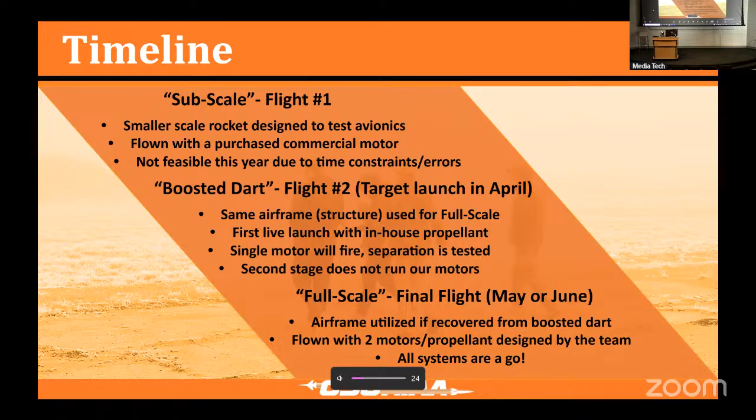I don't know if we had audio there, but it doesn't matter. David, if you're sharing the screen, try to share it and make sure you click the share audio as well. I don't know, I think it was just background music. There were some cool explosions, but it's all right.

So that's essentially what we're doing: we design, we build, and we fly a 2-stage rocket. It just happens to be the only 2-stage rocket on campus and one of the very few in the Pacific Northwest alone.

Designing comes in the first phase of our capstone class in the early parts of the year. That first probably 3 months is dedicated to design, and that includes details from last year: how did they succeed, what do we need to do, what do we need to change, all of that sort of thing.

And then we move into manufacturing. We had some pretty cool stuff come up this year that was new, but it was also reiterations of last year. So the ideal timeline for one of these things is what we start with, what we call subscale.

This is essentially a tuned-down version of what a full scale flight would look like. We don't fly 2-stage, but we do fly a dummy sustainer, or the top stage, that mitigates and basically copies the weight of what a full second stage would look like, so that we can test ejections and we can test that separation. That is what makes a 2-stage a 2-stage.

And then we move into what we call boosted dart. This is essentially what the full scale airframe is, under the same airframe as a full scale. We fly, again, 1 motor and a second stage.

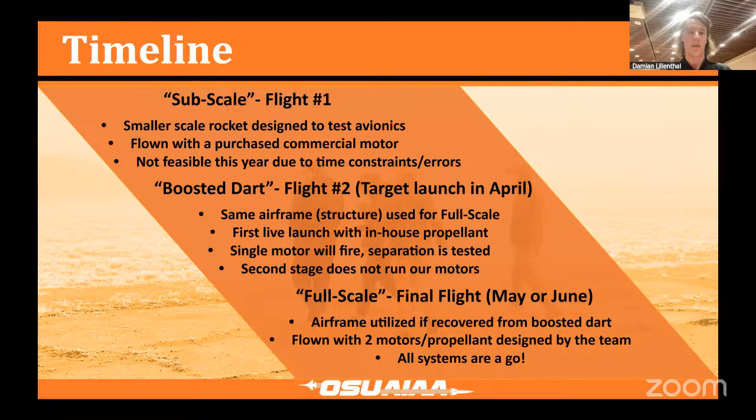So this was a brand new sub team that we introduced this year, dedicated solely to aerodynamics. Last year and years prior, this has kind of been a thing that our structures team has taken on, but we had one of our new capstone guys come in this year, and he had some preliminary knowledge on how CFD works, and he saw enough work to be done to make this a dedicated team.

Essentially what they're doing is all data analysis. They sit behind a computer, run CFDs on previous launches, try to figure out what exactly is going to get us from that 64,000 feet to the 100K goal that doesn't have to do with new propellant, maybe it is weight reduction. But part of that was fin design, so we based our new fin design this year solely on these CFD analysis simulations that they're running.

For weight reduction, we integrated 2 fully composite motor tubes into our builds this year. And then we also added this, what we call a pitot probe, which is essentially what allows us to monitor dynamic pressure, which just gives us a lot more data to fall back on for future teams to come in.

This wind launch correction kit was a new idea that a different capstone had in mind when he came in, new this year. Essentially, this is a ground station, a big box with a 30-foot pole and a computer linked into it that monitors live feed from local weather stations, which would allow us to throw our launch angle at whatever is ideal for that day and time, to maintain a perfectly vertical flight, because we've had launches in the past land 8 miles off horizontally. If we can correct that, that would be amazing.

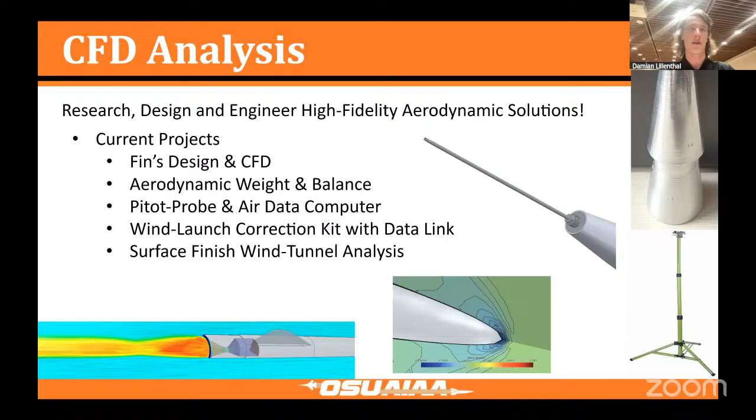And then surface finish, this boils down to paint and wind tunnel testing and all sorts of things. That's all new tasks that a brand new sub-team has integrated this year. Super cool stuff that we haven't done, but we can utilize it for just about every other team.

So next slide. How do we recover? A big part of our builds falls back on successful recovery. We don't just want to launch a rocket in the sky and never see it again. We want to recover it, and that's how we get our data for new builds.

So this is our avionics team, you can see a little picture up there on the right. Small group, but that was the early part of the year. They design what we call an avionics bay, a 3D printed assembly that houses all of our computers and our mag switches. These circuit boards are mag switches, which allow us to kick on our computers on the launch pad once the rocket is fully integrated and inaccessible on the inside. We run a magnet around the outside of the body tube to cue our computers to start, because if we leave them on for prolonged periods of time, batteries will die and we won't recover data. So that's kind of their whole thing.

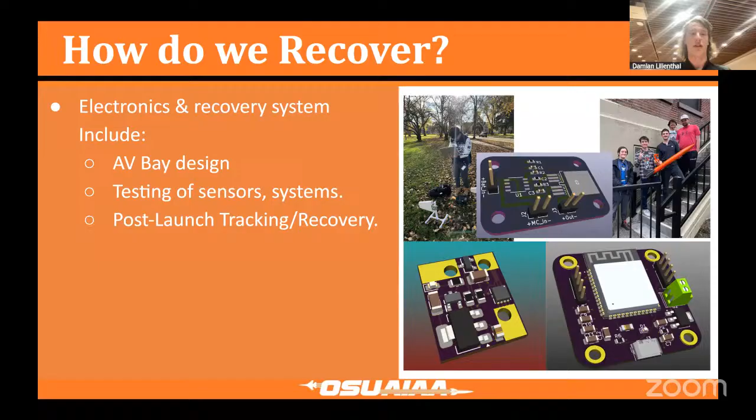They integrated a couple of new computers this year. Post-launch tracking is kind of what this entire system is all about. So, next slide, I think.

Okay, propulsion. We are in the middle of running simulations on new propellant, but every propellant we run in a full-scale build is done in-house in a lab we have off campus. All of our propellant mixes and chemical formulas are passed through chemistry instructors here on campus and faculty advisors that have knowledge from previous teams we weren't a part of. So we're always experimenting with what's going to get us that higher altitude, because propulsion is obviously what makes your rocket go up.

So when the team first started back in 2016, we started with a propellant mixture called liquid sand. Then we moved to black flame, which is what we're currently using. These are pretty similar, with the exception of grain size in ammonium perchlorate, which is the one oxidizer that really makes this stuff go. Super dangerous stuff, but if it's done safely, it's super fun.

And then we're studying this new propellant called cherry limeade with a new AP that, on our simulations, shows a higher specific impulse value than anything we've ever used before. Burns at a much higher temperature, but specific impulse is basically a measure of propellant efficiency. So that's the number we're focused on most when trying to idealize propellants in both of our stages. Next slide, I think.

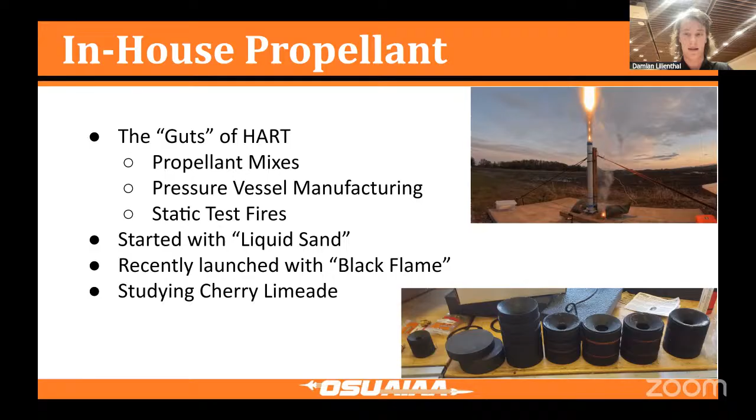And then the airframe, this falls back on structures. So if you're looking for more of a hands-on experience, this is definitely where you want to be, instead of sitting behind a computer running calculations most of the time, or just studying.

So these bulkheads basically integrate into the rocket's body tube, and they're secured by screws on the outside of the body tube that allow us to secure our motor tubes inside without worrying about the tube sliding forward or backward. Because if you have a rocket go up and the tube pushes forward, it's going to try to slide into your AV bay and stuff like that. So we want to secure them as tight as possible.

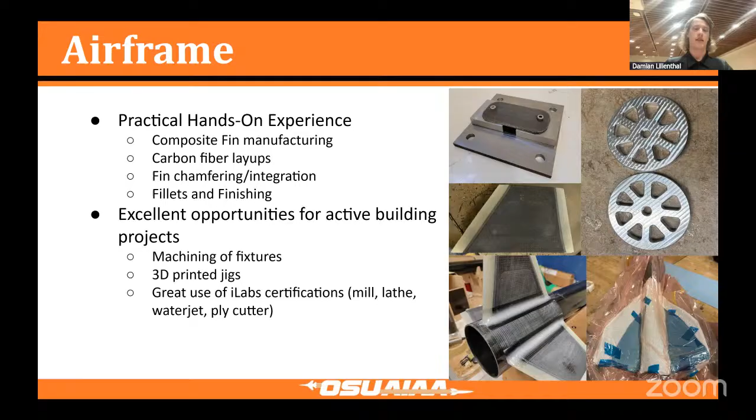Moving forward from one of the three rocket teams that Damian mentioned, if you're interested in the aero flavor of aerospace, we have two plane teams on AIAA. The first one is Design, Build, Fly. Fun fact, this was actually our first team for AIAA, founded about 12 years ago. As the name implies, the competition is to design, build, and fly a remote-controlled aircraft from the ground up every year, according to a new set of challenges provided by the competition heads. For example, last year's competition was all about high thrust and short takeoff and short landing.

So you saw a lot of planes with pretty beefy motors on them, pumping out anywhere like 120 amps, and high lift wing configurations. In addition to short takeoff and short landing, they also had to fit within a parking space. So not just the aerodynamic and power considerations of your plane, but also how it works operationally on the ground. When they had to fit within a small parking space, our team built folding wings, which they would fold up when they needed to park, and deploy for takeoff, landing, and flying the vehicle.

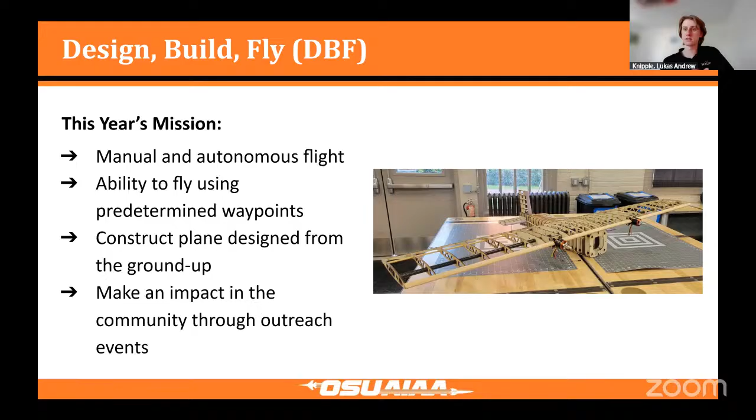Taking a quicker, more detailed look at the mothership this year, they went for a 70-inch wingspan and 2 dual props, with pretty beefy motors on it. They spec'd it for 10 pounds of payload capacity. While they didn't have to make the mothership autonomous, it just had to be remotely controlled versus the fully autonomous payload, they did integrate their autonomous circuitry and platform into it so they could fly it autonomously if they wanted to.

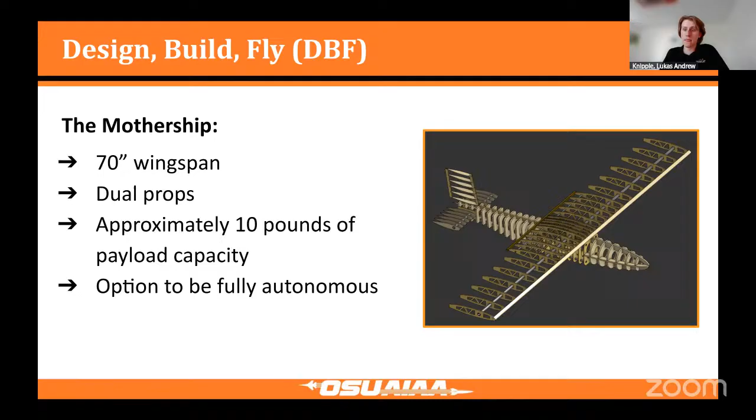I don't know if this video will play here. Watch that. This was them in the very beginning.

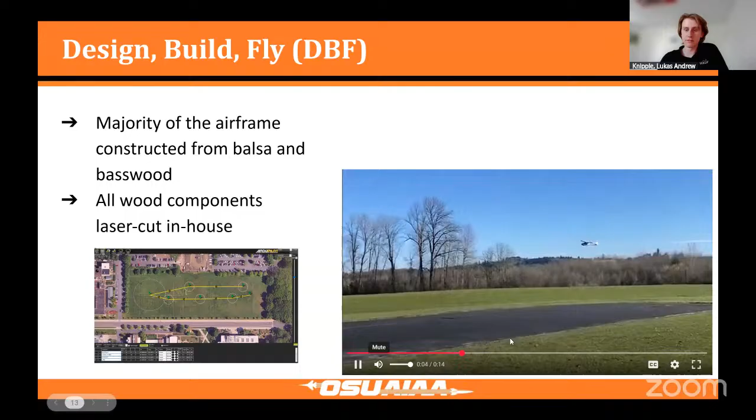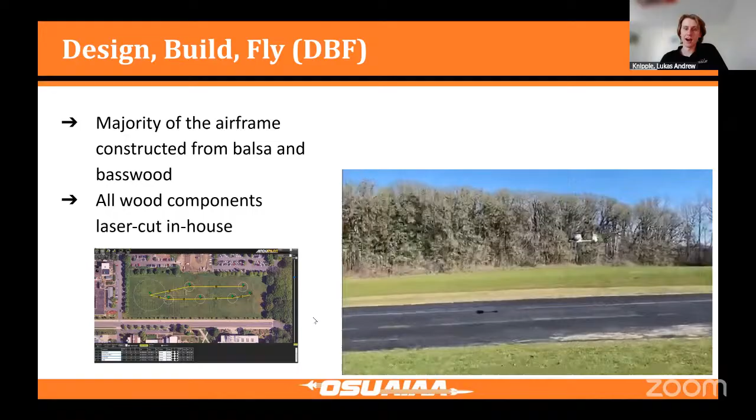A fun thing is you can't just show up and build a plane for the first time and hope that it works. So they had a variety of off-the-shelf glider kits and powered planes that you might find in a hobbyist store, which they were buying in order to understand what goes into building an RC aircraft. This is one of their more successful test flights with that styrofoam plane. As far as construction, it was majorly made out of basswood and balsa wood for a lightweight airframe, so they could have a high thrust to weight ratio.

When it comes to manufacturing and design, we have a lot of facilities on campus that allow them to laser cut all those components. In the bottom left corner, you can see that waypoint mission planning I was talking about. That's PV Field, one of our fields on campus here, that allowed them to play with that technology in developing their aircraft.

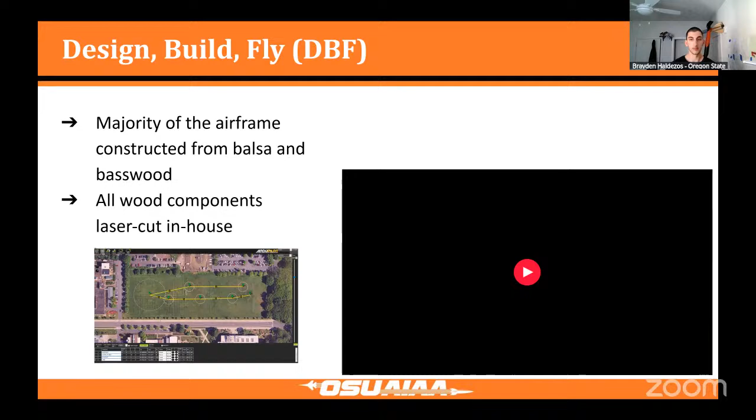A fun fact about that video you just saw is that was their first successful autonomous landing of the glider. That thing landed by itself, which is pretty cool. All right, so that's design, build, fly. It's one of our two-plane teams.

Moving forward, our agricultural drone team. This one's sort of an interesting one. It turns out there's a problem in Thailand where the farming population is aging out, so farmers are becoming more elderly and it's harder for them to maintain their farms and fields. Just physically, it's much more difficult for them to go out there. A farmer connected with Oregon State University with this problem statement and asked them to come up with a solution that would allow these farmers to still produce the output they need on their farms and do everything they've been doing their entire lives despite their aging condition.

So our agricultural drone team was born out of this research grant partnership. The idea behind it is you can have a heavy lift drone that will be able to autonomously navigate a farm and deploy things, anything from water to pesticides to herbicides to seeds, which allows this platform to do a lot of the manual labor that is involved in farming.

Over the past couple of years that this team has been working, it's been a lot of design work, collaborating with the customer. This year they were putting a lot of those designs into action, physically assembling the drone, and doing a lot of validation, a lot of controls programming, breaking things, fixing things, and very much taking on that engineering process that is involved with that.

In addition to developing this platform, the most important components to the customer was that it would be open source and inexpensive. So the idea is that you can put this technology out on the market for not a lot of money, so that any number of people could replicate the design and use it without having to front a lot of cash in a situation like this.

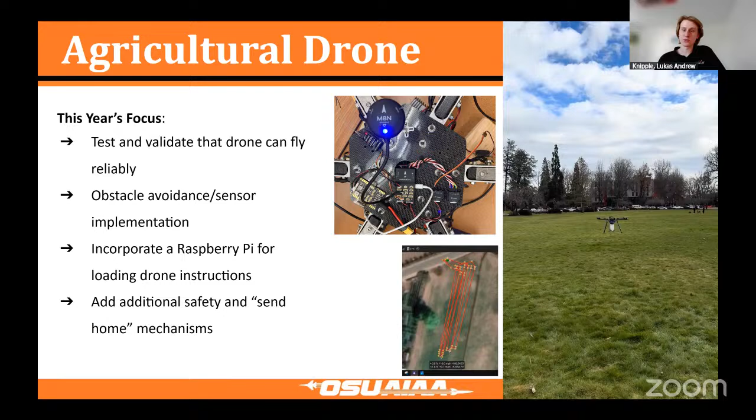This here is a video of one of their first successful flights with the drone to a 20-foot altitude. Some previous mishaps with some of their drone propellers and the control system had caused the drone to actually flip over in some initial tests. So this was one of the first ones where they're getting pretty excited that their platform was actually working with a payload on it, and it was looking very, very stable.

As far as a little bit of features they built into the drone this year, in addition to the core functionality of autonomously navigating the field, they also wanted to make it more user-friendly. So you see things like a Raspberry Pi on board that allows you to update a mission physically to the hardware of the drone, and then you can boot that information off the Raspberry Pi to get the drone to fly autonomously, as well as some safety features like object detection and avoidance, as well as a return home function that allows the drone to return if it detects it's low on battery, or if the user has lost visual line of sight of the drone, they can press a button and the thing comes back safe and sound. So that's agricultural drone.

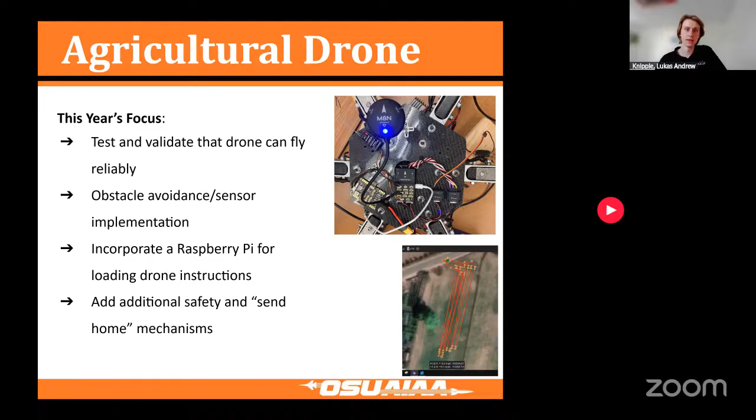All right, awesome. This is the second of our rocketry teams, the one that I'm on. I'm sporting HALE merch today. This one is our biggest team by far, and it is our high altitude liquid engine rocketry team.

As compared to a solid propellant, liquid propellants involve a lot more fluid dynamics. You have fluids like liquid oxygen as our oxidizer, cryogenic fluids to work with, and it becomes a very complicated, difficult process. When you see things like the space shuttle or SpaceX rockets, these are all liquid bipropellant rockets, and we're trying to do something similar to the real space industry just here out of Oregon State.

Next slide please. So, just an overarching goal of what we're doing: we intend to design, build, and launch a single-stage liquid bipropellant rocket to the von Karman line, which is defined as the edge of space at 100 kilometers or 328,000 feet.

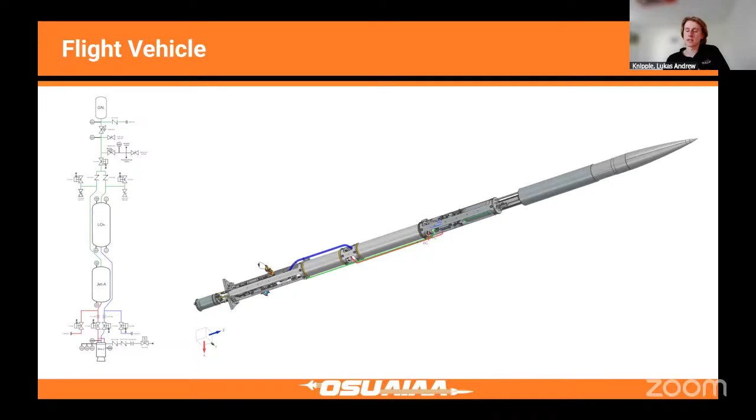I'm going to quickly move through this because we have a lot of content to cover. Looking at some of our systems, this is what our subscale flight vehicle looks like. It is 21 feet long, and it features all the plumbing, controls, structural components, and our second generation engine that will allow us to fly all of our systems, hopefully to 30,000 feet this summer. On the left you can see a P&ID, a piping and instrumentation diagram, that lets you abstract out at a higher level what's happening liquids and fluids wise in the rocket.

Next slide please. So one interesting challenge about liquid rocketry is, in addition to building an entire flight vehicle that you have to trust and that has to work and not blow up on the pad, you have to build a lot of supporting ground infrastructure. When we talk about just getting the propellant onto the rocket, like we see at Cape Canaveral and launch pads, there's so much infrastructure on the ground that allows you to safely and remotely operate your vehicle in preparation for launch.

Here at Oregon State we have our horizontal test stand, on the left, and our vertical test stand, which we're currently developing for the full vehicle. The horizontal test stand was built first, and it's just for static firing the engine alone - our first generation and now our second generation engine have been hot fired on it. In the image, the small cylinder shape at the bottom left represents the engine; everything behind it is just to safely operate and fire it.

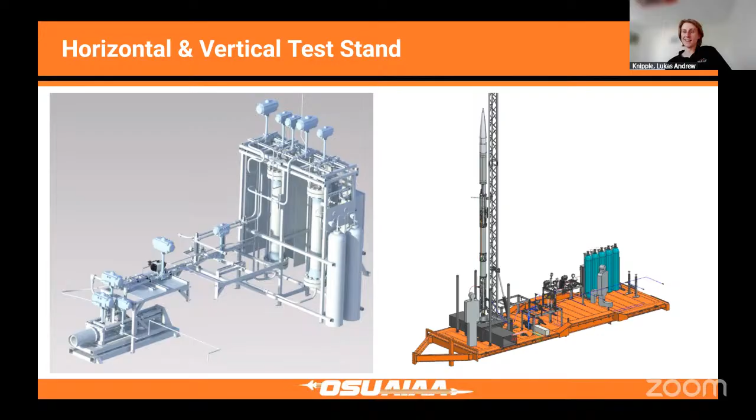On the right side, the VTS does everything the HTS can do, on top of supporting a fully stacked flight vehicle. We have clamps that hold down the rocket so we can static fire the engine with the fluid and plumbing aboard the subscale vehicle, and it also serves as a mobile launch pad trailer. The whole thing is on a 30-foot by 10-foot trailer that we're going to take down to LA on I-5 and launch east in the desert.

Next slide please, and this plays a sort of cheesy hype video of what we're doing.

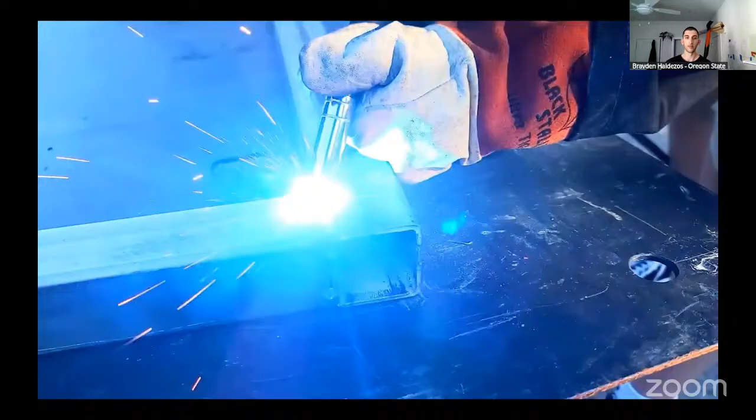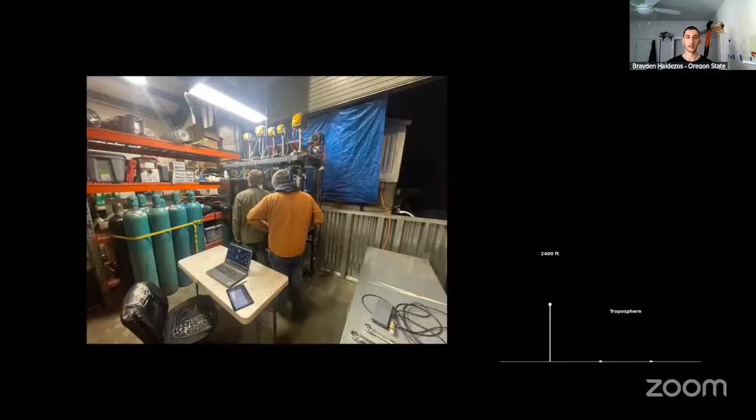So looking at that, that was the first static fire of our second generation engine. It is the first and second liquid engine developed by college students ever made in the state of Oregon. Here are some stills of the second hot fire. The difference between our first and second generation engine is a 50 to 20 pound difference in how much it weighs for the same thrust output - one is a proof of concept, whereas the other is actually light enough that we can put it on the flight vehicle this summer.

Next slide please. So we're composed of 6 sub-teams. I'll run through this as fast as I can - these enable us to do every component of this, and when we talk about hands-on work and what students actually do, it's on these sub-teams. First up is propulsion. Propulsion developed MIRA 1, our first generation engine, as well as MIRA 2, the flight-ready one. This table here is actually pulled from Wikipedia.

It's kind of cool - we use a pintle injector, shown in the bottom left photo. It injects an annular flow of fuel, and in all the directions and holes you see on the side, liquid oxygen gets pushed out into that ring flow to create a cone of mixed fluids. We are one of the pintle injector rockets you can look up on Wikipedia. They've been developing this engine for the whole duration of this program, about 7 years, and now this year we're very excited to actually put it on a rocket and send it up.

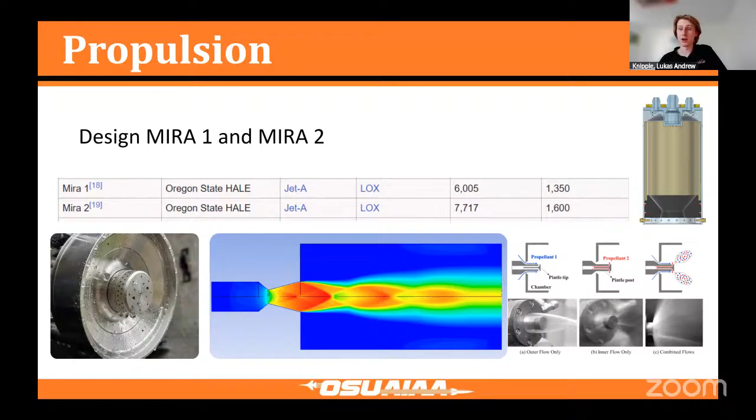For the vertical test stand, this team is completely dedicated to the design, fabrication, and operation of the vertical test stand. This year they've been doing a lot of welding and manufacturing work. They have to support the tanks for our gaseous nitrogen that pressurize the entire system, as well as all the fluids, plumbing, and control to get our propellants, our liquid oxygen, and our kerosene to the rocket.

On top of that, you see the massive launch rail there. It's about 60 feet, we're speccing right now. So they have to build all the support structures for that miniature launch pad to support the rocket before a launch sequence.

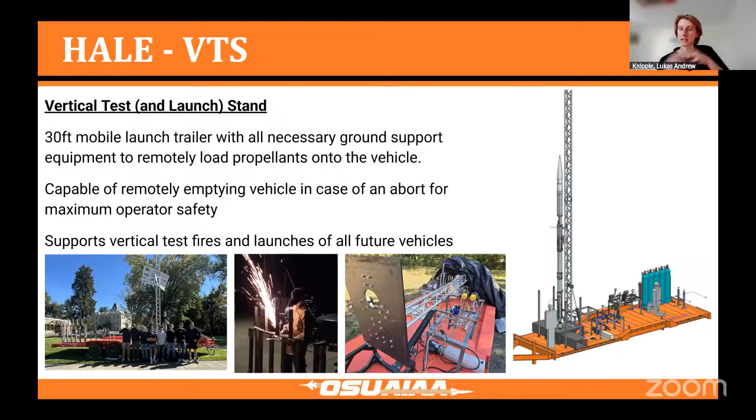Our fluids team is at the very heart of the plumbing of what's making everything happen. So you have an engine, but you need to get your propellants from point A to point B to support that engine and combust it in the chamber.

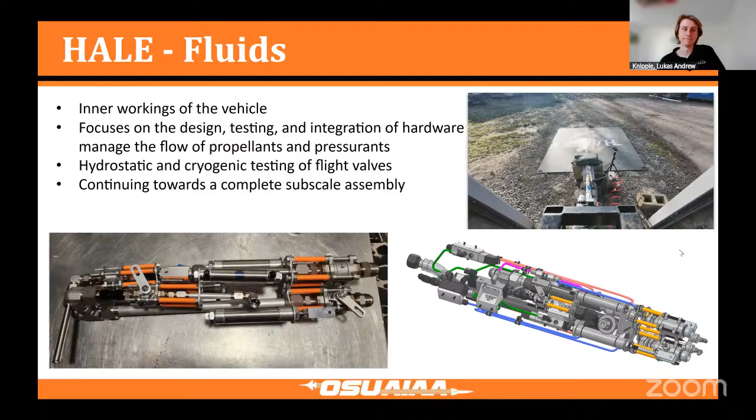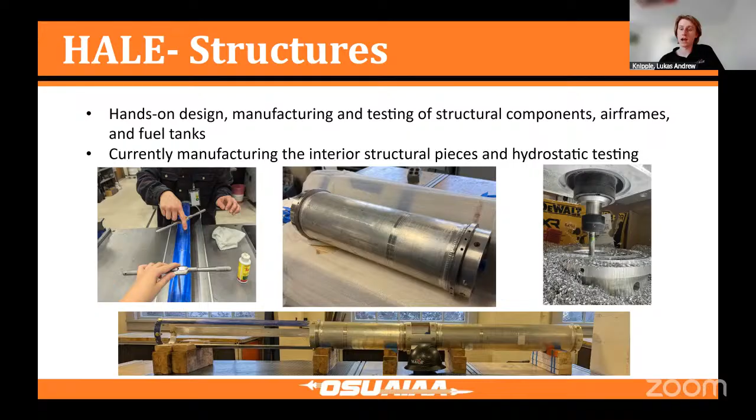They're doing a lot of FEA, structurally validating that this can take the forces the rocket's going to produce, as well as a lot of cross sub-team collaboration on how you get your fluid system rigged up, the wiring in the same part, and how you deploy a chute, and how that all comes together in assembly. They're very fundamental to the actual rocket when it comes together.

Then we have aero and recovery. They do exactly what it sounds like - they are the aerodynamics and recovery team. So any aerodynamic surface on the rocket, they deal with a lot of simulation on their part, making decisions about the nose cone shape and the fins and stability for the rocket, as well as designing a recovery system.

So we have a 2-parachute system, like Damien was mentioning, where you have a drogue chute and a main chute. Our drogue is 15 feet in diameter, so it's already a pretty big chute, but that's the smaller one, just to slowly descend from 30,000 feet.

Then when we're close enough to the ground, we pull the main chute. Why we don't pull the main chute all the way at the top is we don't want it floating like 30 miles by the time it hits the ground - that makes a very hard recovery on our part. So it's a 2-stage parachute system, and they're doing all the force calculations, the snatch force when we pull at apogee, making sure that whole thing is up to the standard we need it to be.

Safely. Then avionics, I can talk your ear off about this - this is what I'm on. Avionics is at the heart of the controls. Any electrical system on HALE, that's what avionics deals with.

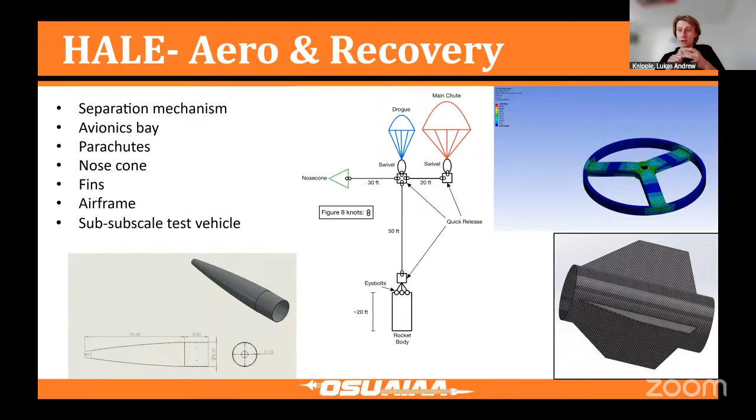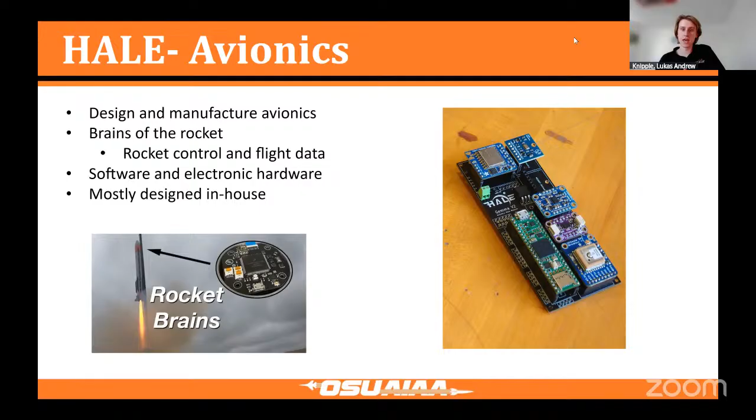Because we're doing so much active fluids control, we need a lot more custom design components because we need to interface with so many more sensors. That's a lot of what we do on avionics. And then that's all of HALE. So I'll pass that off to Brayden for APOP.

Moving off from one of the rocket teams and on to one of our jet propulsion teams - APOP is actually a design competition where every year a team is given this little JetCat P100 engine. You could hold it in your hands, and you have to design some sort of object that goes onto the engine and performs a specific task.

So last year, the design was to generate a reverse thrust mechanism, which you'll see here in a sec. This year, their job is to design a variable thrust nozzle for this engine.

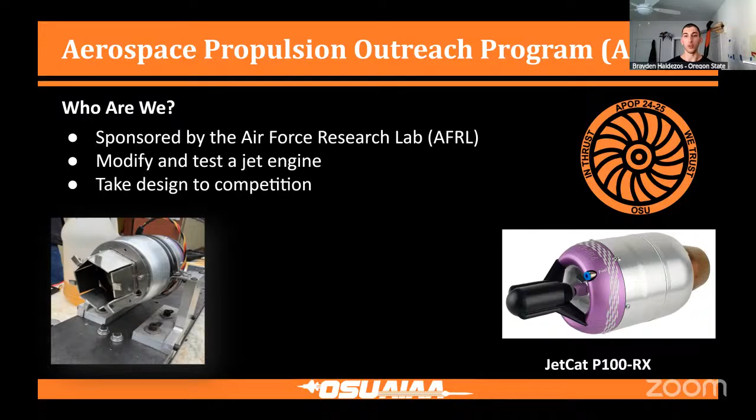The way they went about it this year is by designing fins that are all connected together by a helix gear, and a servo motor inputs motion onto one of the fins, which controls all of the fins at the same time. You can adjust the amount of thrust the engine produces by changing the flow out of the nozzle. The team is actually at competition right now at Edwards Air Force Base, which is pretty cool.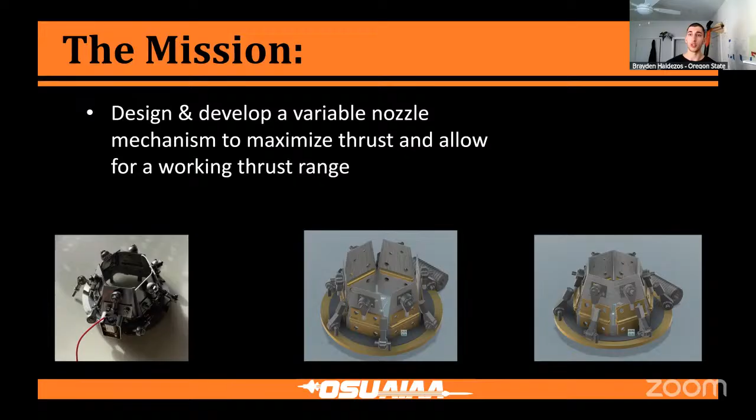Oh, my bad. Got to mute this video here.

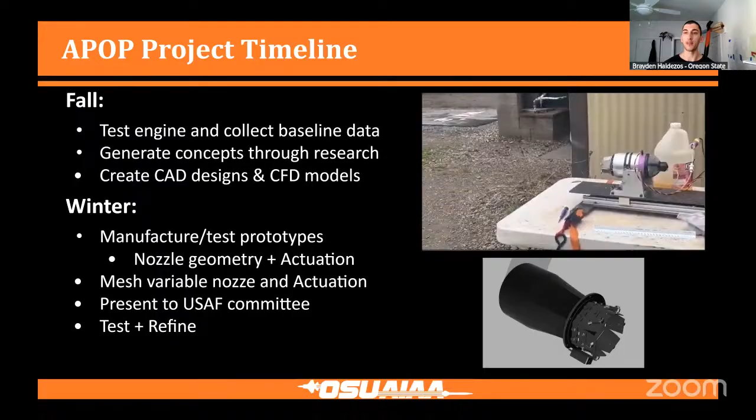This team runs in the fall and winter because their competition takes place in the spring. During the fall term, there's a lot of designing what this mechanism is going to look like. Here is a video of a very early test in the late fall. During the winter is when they actually do a lot of the manufacturing, so on the previous slide you saw a couple iterations of their nozzle. Then in the spring they go down to the competition. There's a final report, and in a week or so we'll find out whether or not they won. But last year's competition, they actually won first place, which was pretty cool.

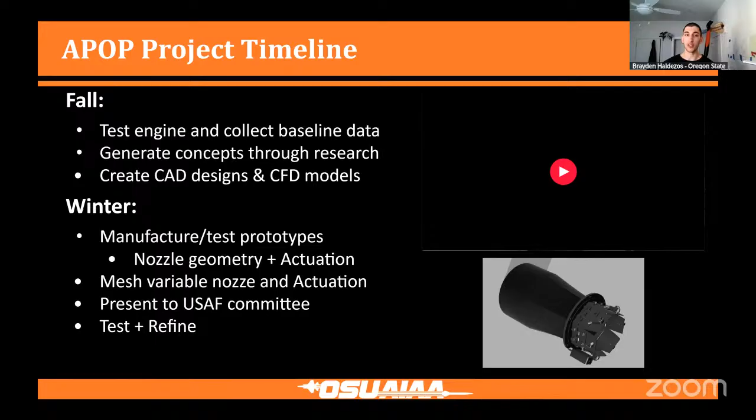But that's APOP. Moving on to solar airplane.

This is a research team, and the goal of this team is to design a high altitude flying glider that is completely powered by solar panels. If you think about satellites, they'll go up into space, do their science research for a couple of years, but eventually they die out, and then you just have space debris in the atmosphere. At the professional level, these gliders can stay in the air for months at a time. They have very low emissions, very little launch costs, and can perform the same science research that some of these satellites can.

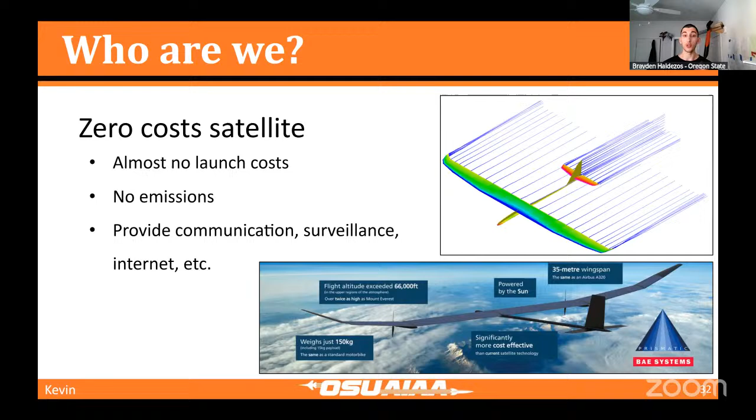So last year, you can see a little rendering in the top right of what our solar airplane looked like. It's got a huge wingspan, a lot bigger than it looks. But this year, the team made a dual fuselage because they found that when you attached a payload onto just one fuselage, it created a lot of buckling in flight. So they added a dual fuselage, and the goal was to increase the payload capacity while also increasing flight time. Last year's team was able to achieve a 2-hour flight time, and this year's team wanted to achieve that same goal with a dual fuselage design.

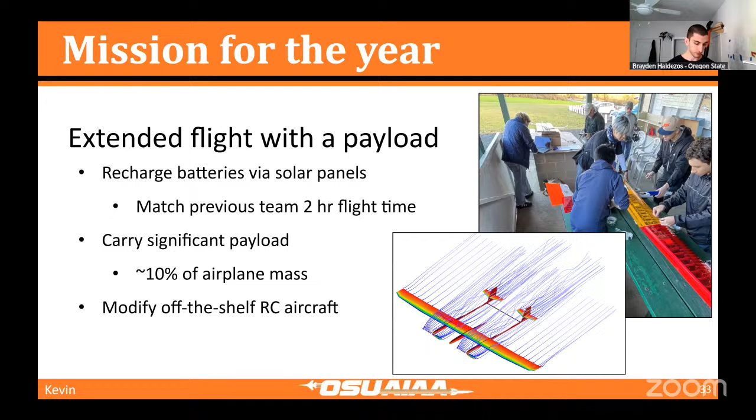So we have a test flight video here. Doesn't have some sound, oh my bad. I'm skipping through these slides accidentally all the time.

But here you can see a test video. We go out a couple miles away and we have this guy named Dave, and he flies the plane for us. He's like a professional drone pilot. For DBF's plane as well, he can also fly that plane. But I think this is super cool, just a casual glider in the atmosphere flying over unknowingly passerby cars. So I don't know, I think that's cool.

But that is solar plane. Moving on to our last rocketry team, this is the student competition rocket team. You've already heard a little bit about the other sub teams, and on the other rocketry teams, we are no different. A lot of the stuff that we do is very similar, but I want to highlight some of the really cool, unique things about this team.

This, that you can see here playing in the video, will use a PID controller to detect the altitude of the rocket as it's accelerating up to 10,000 feet, and it will deploy these air brakes, or these little thin pieces of metal that induce drag on the rocket and slow it down to approximately 10,000 feet. So if we aim for just over 10,000 feet, this can decelerate us so that we reach as close to 10,000 feet as possible and ideally win our competition.

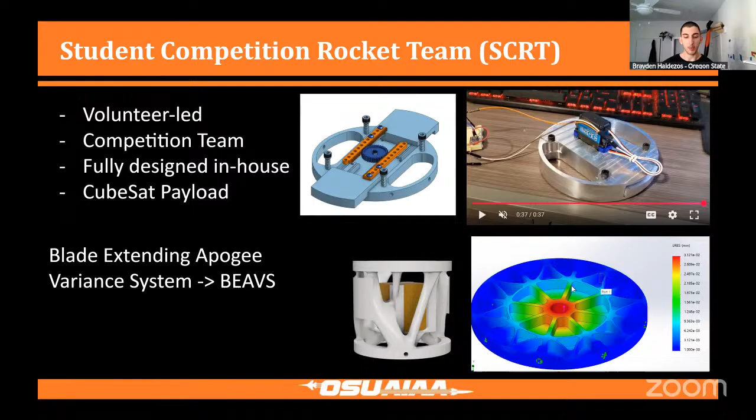We do a lot of FEA on some of our internal structural components, as well as our bulkheads. We try and make those as efficient as possible from a mass perspective.

We've also got a CubeSat payload. This is what I did my senior design capstone project with. So we launch a payload into this rocket, and each year you're free to do whatever you want for the payload. This year, our payload was a planetary exploration mapping and data analysis system, PEMDAS.

The idea here is that if you were to go explore a foreign planet and it's got some sort of potential habitability for life, then what would you want to send to that planet to determine if there's life there? Our payload has an assortment of sensors that collect data while the payload is descending down.

Once the payload gets on the ground, you can see here in the picture on the right, there's a little scooper mechanism that will scoop dirt into a repository, and then it'll analyze the material composition of the soil.

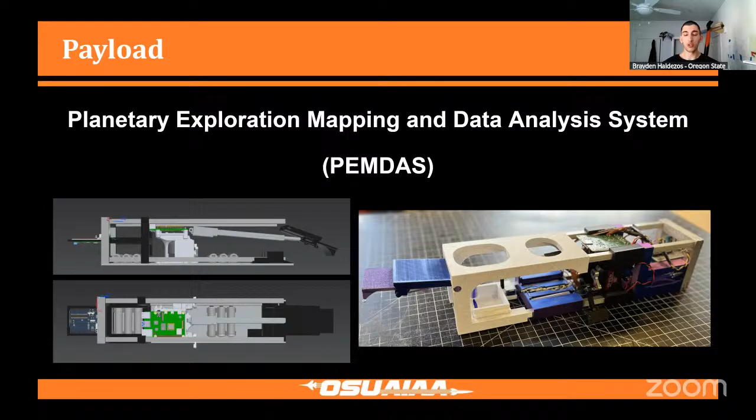We've got a little camera on the bottom so that while the payload is descending from the rocket, it'll take pictures of the terrain. We've trained an AI model to identify features that would correspond to indications of life, like rivers or trees or things like that. So those are some of the aspects of this payload.

Now, that was all 7 of our teams. At this point, I think we can open it up for questions, but that's all we got. So thank you guys, I'll go ahead and stop sharing here.

All right, thank you guys for everything. I actually have a couple of questions from me, and then I'll keep an eye on the stream for anybody with questions. One thing that's come up with my experience with students is: what should they focus on to get prepared for doing the types of things you're doing, to be part of a capstone team or a volunteer rocket team? What coursework or interests should they look at, or how would you recommend they get started if it's something they'd be interested in?

Yeah, well, I think all 3 of us are going to have the same answer here, and that is you actually don't need any prior experience at all, at least when it comes to our teams, and I'm sure that's the same at other colleges in their aerospace programs. I don't know about Damien and Luke, I'm sure they started in a similar place as me, but I had like zero engineering experience at all. No aerospace engineering experience, nothing.